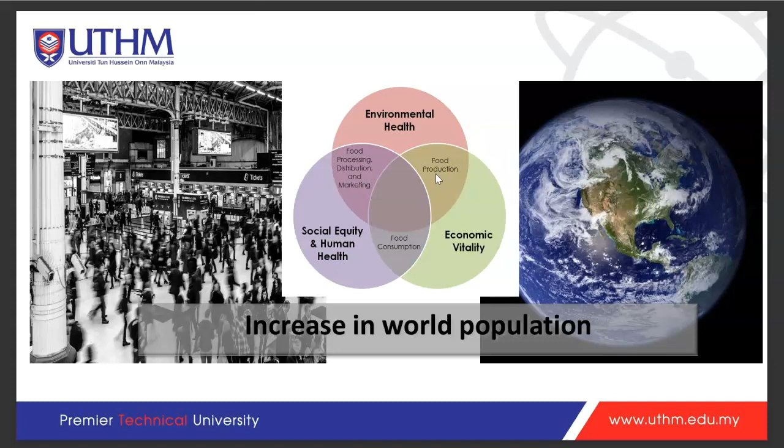Whenever economic and environmental health is in concern, food production is much needed. Whenever social or human health and economic is in concern, there is food consumption. So all of this requires us to learn about food, specifically in the manufacturing sense, so you could provide the world with food in the future, or better food in the future.

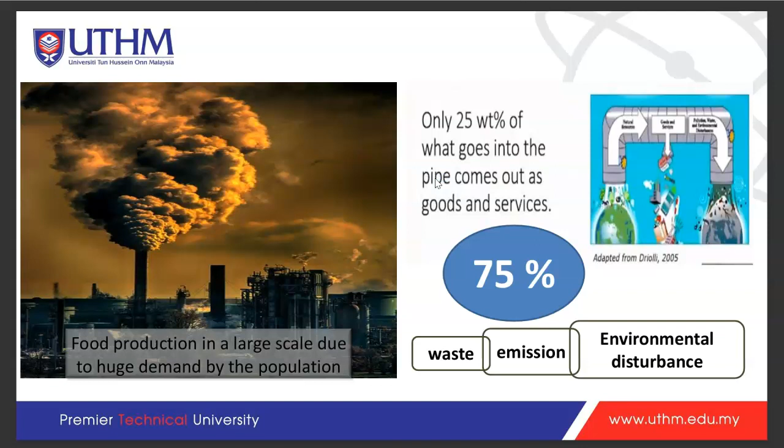So this is about the industrial revolution that is going on, and food production in a large scale due to huge demand by the population.

So currently, we know that we can't help the price of modernization. We will suffer with some pollution, either from the river next to the factory processing some chemicals, or they release it straight to the river, or the accumulation of rubbish due to people dump site areas, or even the air pollution from the factory processing products.

And because of all of that, the need for green technology is in need. So how do we define green technology? It is the application of one or more of environmental science, green chemistry, environmental monitoring, and electronic devices to monitor, model, and conserve the natural environment and resources, and to curb the negative impacts of human involvement.

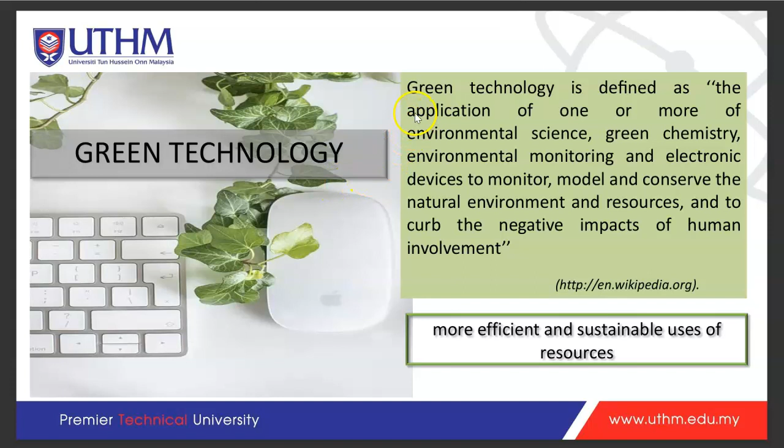That means by applying green technology, it will be more efficient and sustainable use of resources. So if you're doing any project and want to claim that your project is green technology, it will apply some of these, if not all of it.

In terms of food processing green technologies, the purpose of them is: number one, to provide safety and to increase the shelf life of certain food. And it's not just that - it is to increase or retain the nutritional properties of the food.

Before this, it was difficult for us, if you're using thermal technology, to sterilize salad. But now with recent technology, salad can be sterilized and packaged very well to increase the quality of the food itself, and most importantly, you want it to be convenient. You want to take it maybe from the fridge straight to your wok, or you just need to heat it up a bit and you can consume them.

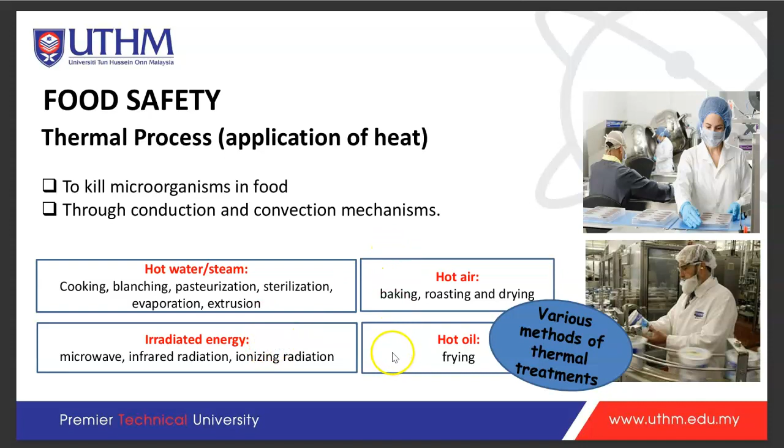Now, a little bit of review on thermal process technology - application of heat on providing food preservation. Basically, food preservation is to kill microorganisms in food through conduction and convection mechanisms. This is a little bit of revision as well: hot water, steam, irradiated energy, hot air, and hot oil, and there are various other methods of thermal treatment.

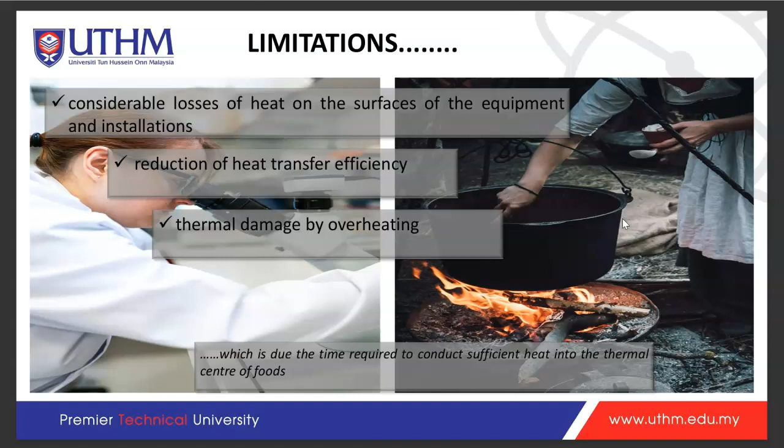But the limitations of this - although it's very easy and one of the earliest ones - considerable loss of heat on the surface of the equipment and installation because it's open like this, and when you have it heated up, it will distribute it all and you cannot conserve the energy there. Reduction of heat transfer efficiency and thermal damage by overheating, which is due to time required to conduct sufficient heat into the thermal centre of foods, and the boiler part as well.

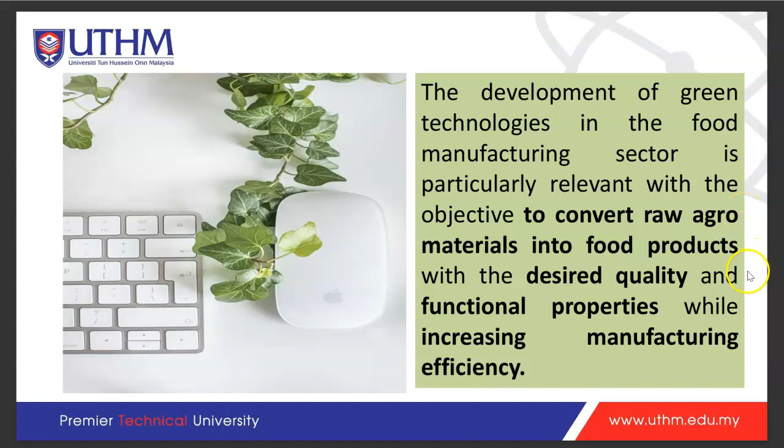So the development of green technologies in the food manufacturing sector is particularly relevant, with the objective to convert raw agro materials into food products with desired quality and functional properties while increasing manufacturing efficiency. Now, this non-thermal processing - we have gone through this before. Let us go straight to this HPP part.

The ability of HPP to deliver a clean ingredient statement, fresher flavor and better nutrition provides a unique point of difference for producers. HPP is indeed a paradigm shifting technology for the food industry that is on trend with consumer interest. Its use will likely grow as cost declines and food manufacturers identify new applications where HPP can deliver product improvements that consumers appreciate and will pay for.

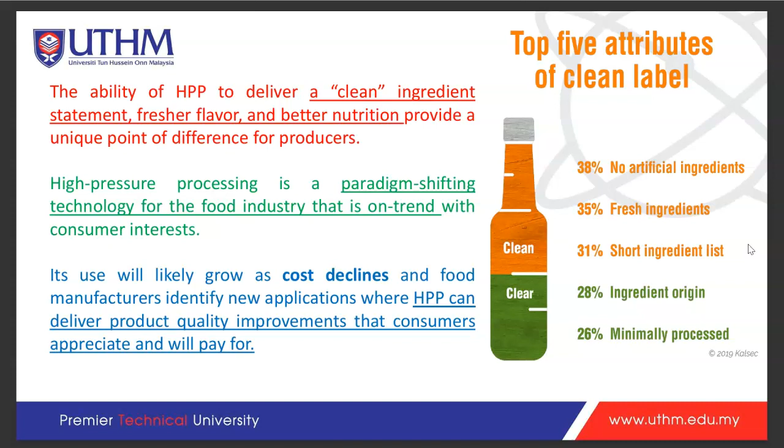These are the top 5 attributes to clean label: 38% no artificial ingredients, 35% fresh ingredients, 31% short ingredient list, and 28% ingredient origin and minimal processing.

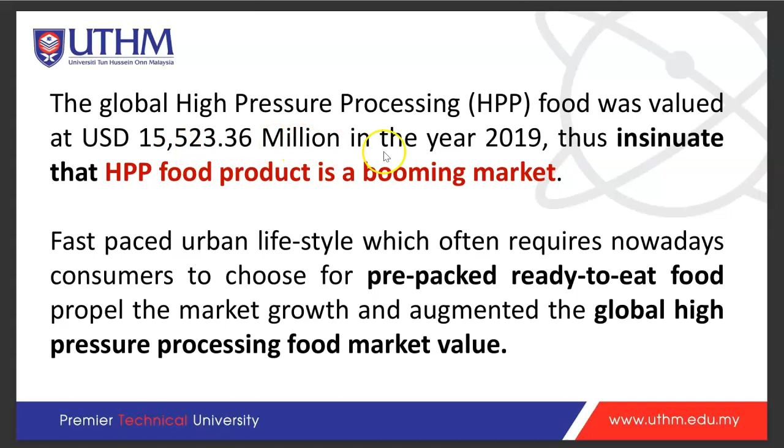Now the question is, what is the trend of HPP now? It has been used to sterilize meat and seafood steadily, juice and beverages, all-time favorites, dips, wet salad and baby food, pet food, dairy, and ready-to-eat meals.

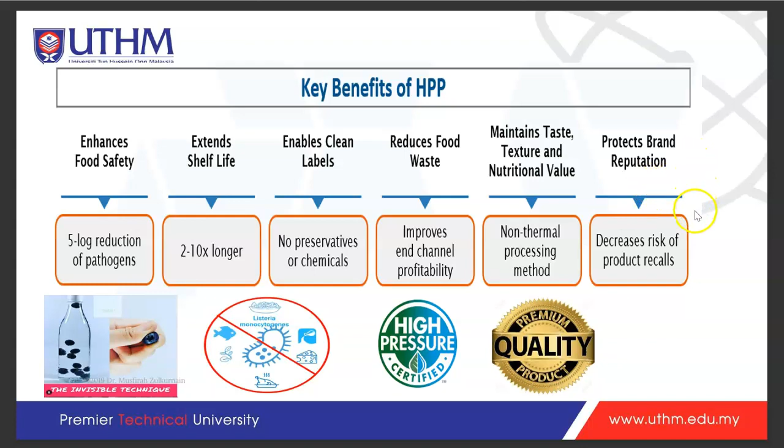Now the key benefits. What are the benefits of HPP? Number one, it enhances food safety—you can reduce 5 logs of pathogens. Because of that, it extends shelf life 2 to 10 times longer, depending on the type of food product. It enables clean label, no preservatives or chemicals needed to sterilize, reduces food waste, improves the end channel profitability, and maintains taste, texture, and nutrition due to non-thermal processing. Last but not least, it protects brand reputation by decreasing the risk of product recall.

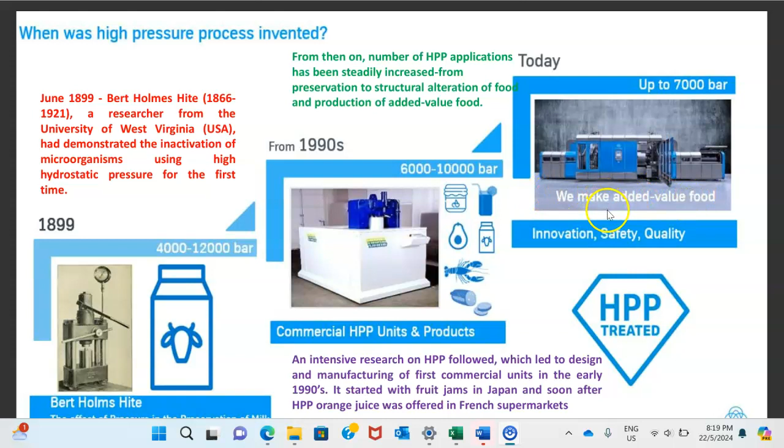So when was high pressure processing invented? From 1899 up until now, if you look at the type of machines, today it looks like this. If you look at it, it is quite big and chunky, and you can put the product inside—so it's quite big, and of course very costly. But the volume that can be put inside is also big. So as soon as we overcome the cost of the machine, it will give high profitability for the manufacturer.

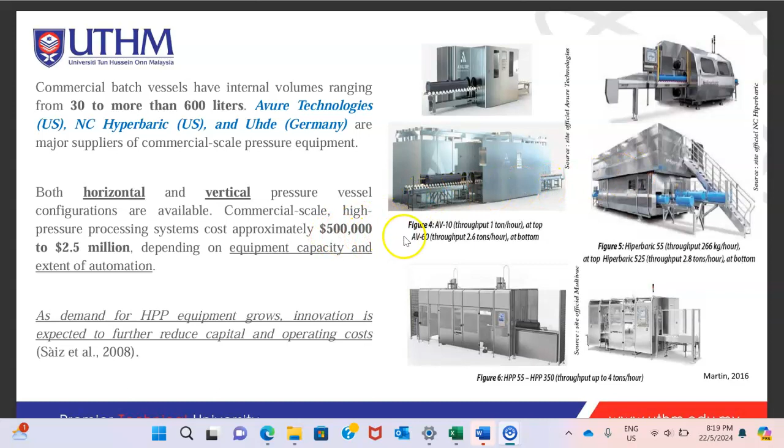These are the commercial batch vessels available for HPP. We've got about 30 liters up to 600 liters of HPP vessels. Both can be horizontal and vertical. The price can range from 500,000 to 2.5 million USD.

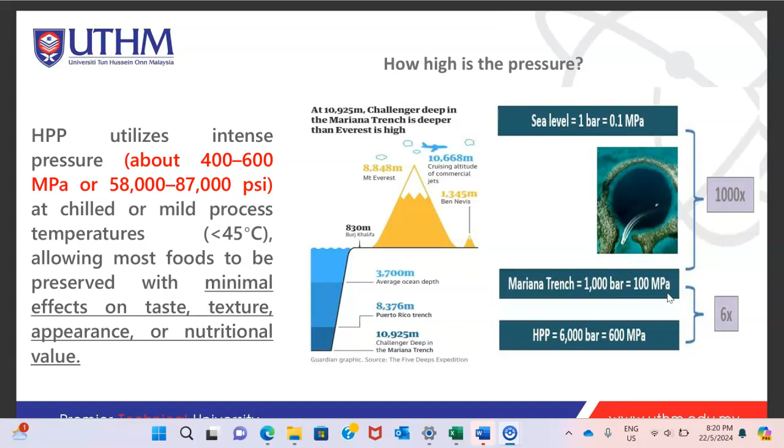So how does it function? HPP utilizes intense pressure. If you look at the pressure, it's about 400 to 600 megapascals, or if you convert to PSI, it's about 58,000 to 87,000. How much is that? If you imagine being in the Mariana Trench, that gives you a depth pressure of 100 megapascals. So that means in HPP, it's 6 times the pressure of being underneath the Mariana Trench.

So how does it work? How does HPP processing function? The food product is packaged in a high barrier flexible pouch or plastic container—a special or designated packaging. The packages are loaded into the high pressure chamber. Once loaded, the vessel is sealed and filled up with a pressure transmitting fluid, normally water, and pressurized using a high pressure pump. As we learned from Pascal's law, the pressure will be uniformly distributed throughout the entire sample, whether in direct contact with the pressurizing medium or insulated from it in a flexible container.

For most applications, products are held for 3 to 5 minutes at 600 megapascals. Approximately 5 to 6 cycles are possible, but this depends on the type of food product you are processing. So it varies and could go up to 15 minutes, and you can vary the pressure depending on the type of food. After holding the product for the desired time at the target pressure, the vessel is decompressed by releasing the pressure transmitting fluid. After that, out comes the product, all sterilized and ready to be stored and distributed in a conventional manner.

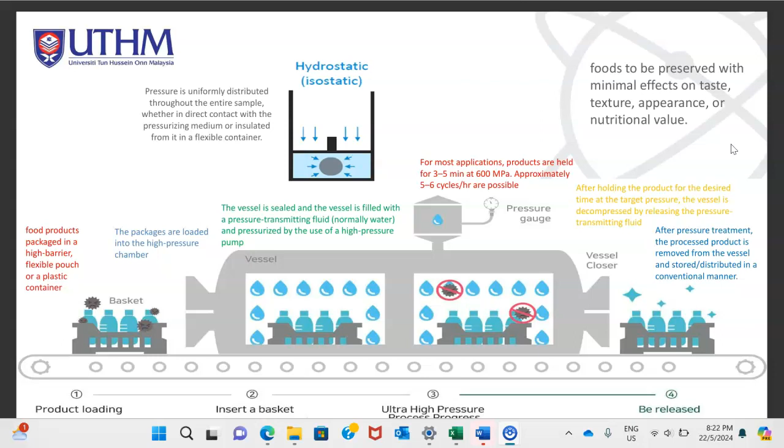Here is the underlying principle of HPP: isostatic pressure. Pascal's law indicates that all pressure will be instantaneous and uniformly distributed. Along with the increase in pressure at room temperature, adiabatic heating will occur. The key point here is room temperature—you won't have an increase in temperature, hence it does not deteriorate food quality.